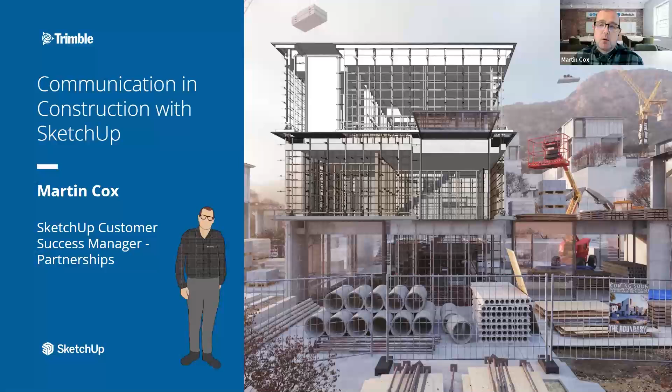So my name is Martin Cox. I'm a customer success manager for our partnerships.

The webinar we're going to be going through is really about communication in construction using SketchUp. We'll be talking about SketchUp and other pieces of software, and how we communicate using different pieces of software. There's going to be a lot of information in this webinar, so hopefully as we go through it's clear. I'm also going to use SketchUp to show some live examples, so hopefully technology will behave as we go through.

So what I'll be talking about: I'll give a quick introduction, and we'll talk about SketchUp and Trimble, more information on what we'll cover in the webinar. We'll discuss why construction is hard - there are so many factors in this. Then introducing connected construction, where we talk about why communication in construction is so important, and how SketchUp can be a big part of this and how it's used. We'll talk about some real life examples, and I'll show some SketchUp models going into more detail around that communication element.

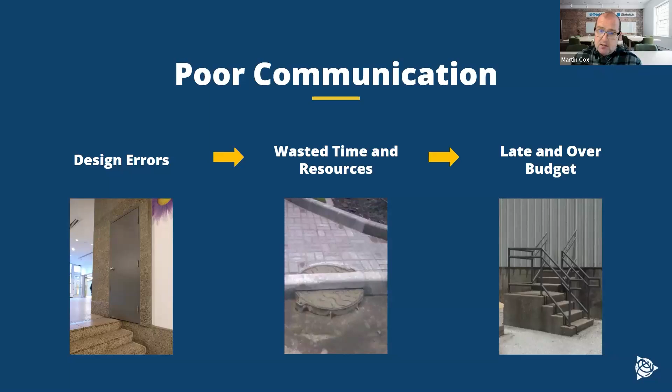So first of all, what is connected construction? We look at what we talk about as the three C's, and these are fundamental building blocks within that construction process that work across the entire Trimble portfolio, and also other pieces of software as well. SketchUp is a true collaboration tool, and we'll certainly talk about that. So, the three C's in connected construction.

So we have connected. This is breaking down data silos to improve interoperability and document management. The benefit to customers is that all aspects and the different phases of a construction workflow are easily shared, easily discussed, and easily understood. So everyone can work through this as well.

Then we have our content. Streamlining our workflows means that we have our library of data. It's all curated, so it can be traceable. The benefit from this means that everyone is looking at the same thing. So somebody's not looking at an old version of a drawing and then saying, okay, this is a different version, and mistakes are made there. People know where something goes, how it needs to be installed, and the equipment that you have at that time.

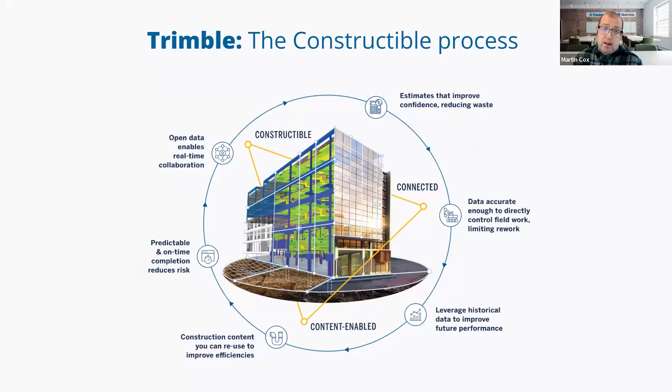So we have proven results around this. We have some huge projects that have worked in connected construction within Trimble, and we've seen a significant improvement in rework, that things are executed faster in the field. There's less waste, and simply the numbers around how many people are connected and how many models are being shared. We're seeing real changes within that process within construction.

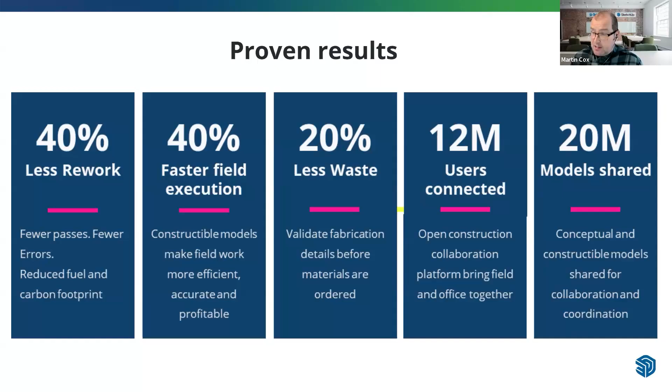Where SketchUp sits within this workflow is literally right from the beginning of creating those concept models, the planning within the models, and then we start looking at other pieces of software like AutoCAD and Revit as well, designing around the models, developing, analyzing those models. We have other pieces of software as well, and visualizing.

And then this part of iterating those different versions of the models—yes, we go around in circles there, lots of changes, but SketchUp sits easily in there as well because we can see fast changes, sharing of those models. And then we have the approvals of the models, full detailed design.

And then again we're with Revit and AutoCAD, or Tekla Structures, and other Tekla Trimble software as well. Then construction phasing, and helping within SketchUp with the visualization of the planning of construction—a big part around this as well. And then we end up with our building.

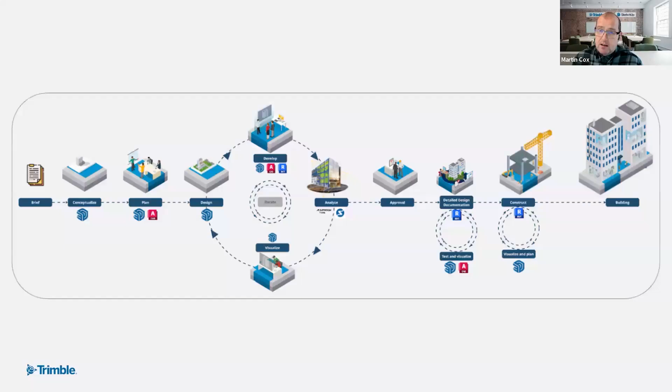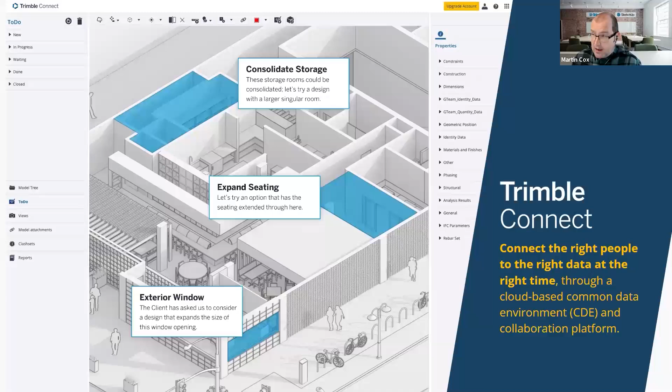But a key part of this is our connected construction, and we talk about this with Trimble Connect, which comes with the SketchUp license. Trimble Connect is a cloud-based platform that connects the right people and the right data, so everyone has access to this. So how does SketchUp really help communicate?

Now we're really going to focus in with SketchUp. It's worth mentioning that as I talk through the next slides and our example demos, we're going to be looking at multiple versions of SketchUp. There are different levels of SketchUp—we have SketchUp Go, SketchUp Pro, SketchUp Studio, and others as well, and they have different tools and capabilities.

I'm not going to go into details in this webinar about all these different versions. The best thing to do is talk to your partners, talk to a reseller, and they will find the best fit for you depending on the workflows you're looking at for SketchUp. Just be aware that some tools, depending on the version of SketchUp you have, you may not have—they come in different versions, and I'll try to point them out as we go. Your partners will be able to help with that and recommend the best fit.

So where does SketchUp sit within that communication workflow, that construction workflow? We know where SketchUp is used, and we understand where it sits. We know that the majority of users are using SketchUp for visualization, also presenting ideas and sharing those models, and documenting this.

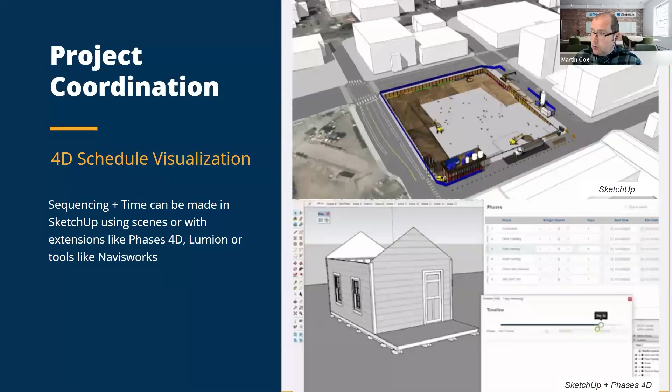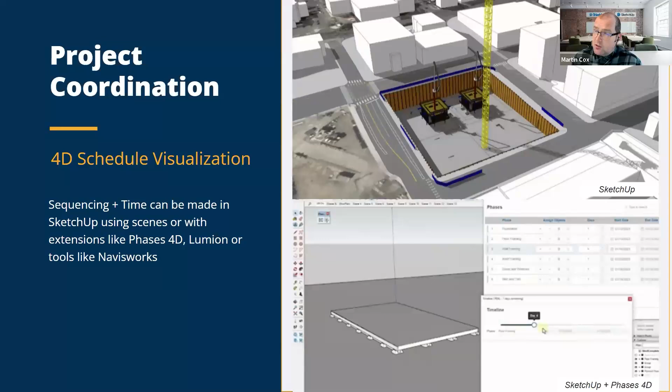There's also project coordination - the 4D schedule visualizations. With the addition of time, we can create these 4D schedules at different levels. So basic 4D sequences have been created within a planning model to show where the site is going to be, the stages around a site, and where things are accessed. Or you can use different extensions like Phases 4D or Lumion, Navisworks, that create some of those schedules as well. That's one area within that coordination.

Another one is project coordination around site logistic plans. Given the complexity of construction projects, creating site logistic plans is standard practice now. Often they can be a static 2D drawing that remains the same, but with SketchUp these plans can contain full elements around the construction, showing delivery routes, locations of where things are going to be. It's great to be able to communicate the site design to a customer saying this is where your site is going to be, this is where we're going to put our equipment, this may be where you're going to lose some parking spaces. So this is where the communication comes in.

Understanding those processes also helps identify areas of potential inefficiencies, areas of concern or conflicts - like the timings where, while the glazing is going up, people cannot work underneath there. So if you have that area of glazing, you don't bring in the team to do groundworks underneath it. We can show that, and SketchUp is often used in these logistic plans because of its flexibility and 3D Warehouse, being able to bring in and say this is where a crane is going to be, this is where a lorry is going to be.

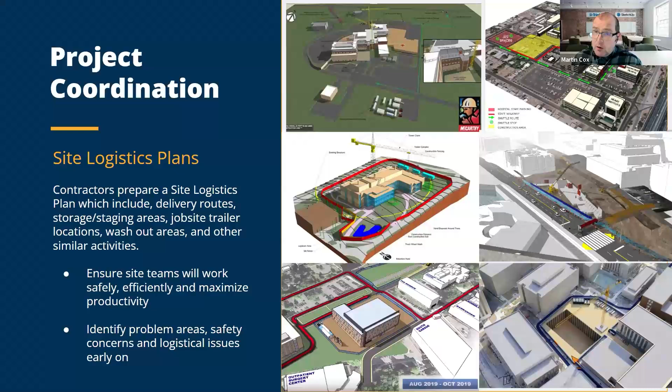Working within those detailed site logistics, you can see how clear it is. With our 3D plans here, we can show delivery routes, delivery locations, storage locations, and those areas as well, and it really helps with all of those things that I mentioned.

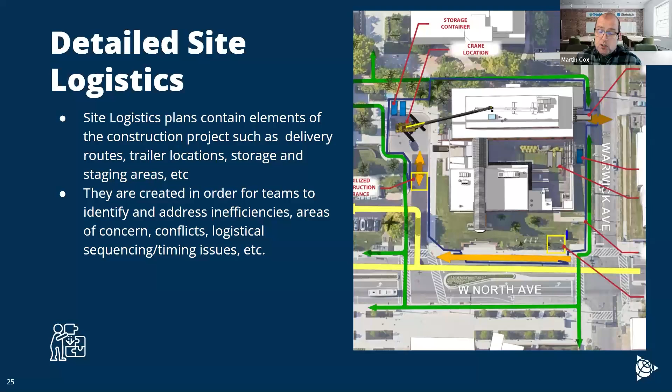So this is a huge part of where SketchUp sits within a lot of our construction customers. Now, something that's happened, and still happens on a regular basis, is these construction mock-ups.

These are basically showing potential complicated areas, and construction companies spend thousands of pounds, euros, dollars, all over the world, actually showing a physical model of how these glazing assemblies are going to go together. They're quite complicated. Now, the physical mock-up is usually developed before the actual assembly is performed, so the trades can learn how things are put together.

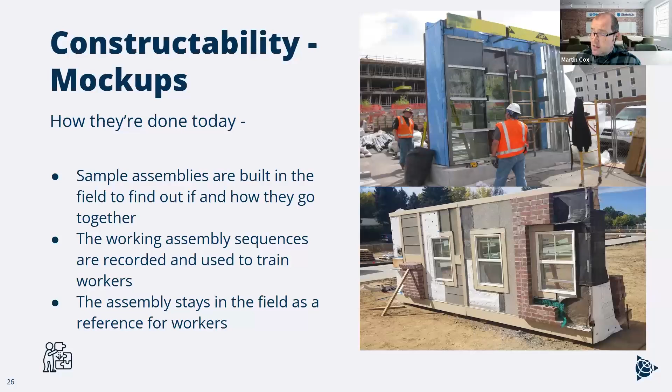That stays on site. It literally sits there, so people come over and have a look at it. But again, a big part of this is creating those virtual mock-ups.

These virtual mock-ups are created first, before the assembly, so they can assist the assembly processes. During design, models can be exploded, they can be shown with more detail. Even with those physical models that we saw, things can't be hidden, so they're carefully designed to almost show those layers.

Whereas a virtual mock-up can explode, it can be hidden. So we can show details here that you could never make, like this example here, seeing how that sits on top, with detail zooming in, cuts and crops as well.

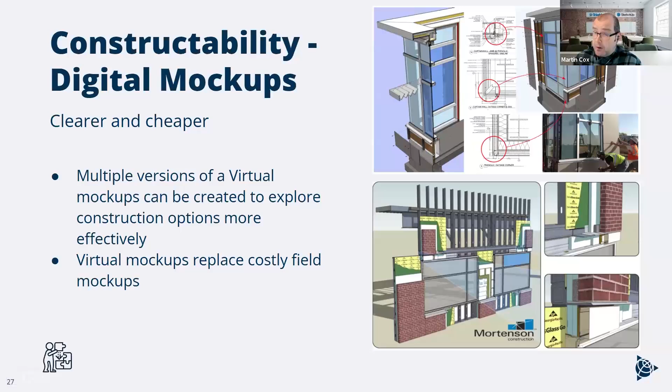And as you can imagine, these are much cheaper to make, and can go into much more levels of detail. So those three-dimensional details can really show the clarity, so it's more clearly understood on the job site.

And these are all real examples, examples of where we've worked with customers around the world. Okay, so let's get into some actual examples here.

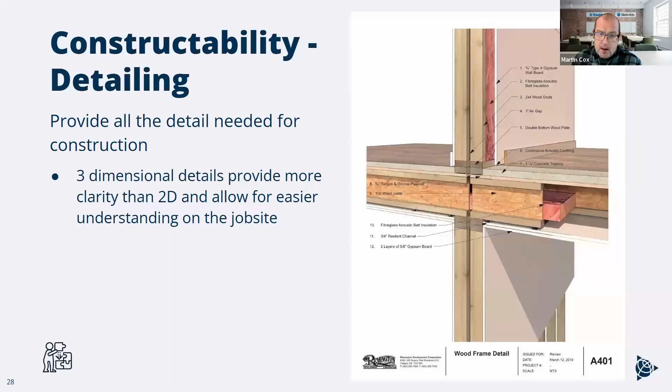Let's start having a look at SketchUp here. Within our workflow and the next example, I'm going to show a video, and it will help explain this because I'm going to talk through these different options. I want to walk you through showing how some of this integration happens. We're looking at using Connect here, using SketchUp right from the beginning of a workflow, and seeing how that expands all the way through.

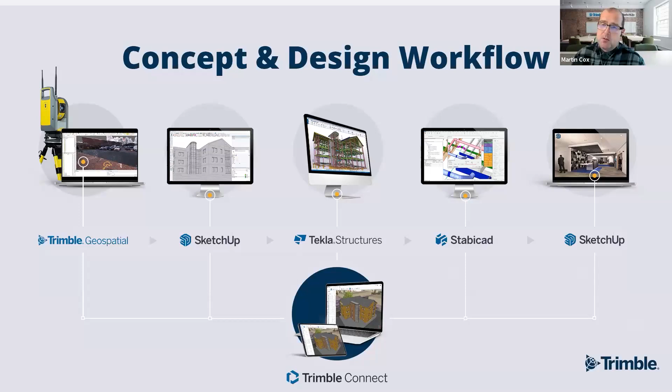So right from literally setting up that site, we're going to introduce some other tools and see how they work within this workflow. So this is a video that I am going to talk through. I may pause it sometimes, I'll be completely honest, I don't believe in trying to trick anyone with video editing. The reason this is a video is we're showing a huge amount of information, different tools I'd be swapping in between, and it's much easier using this option.

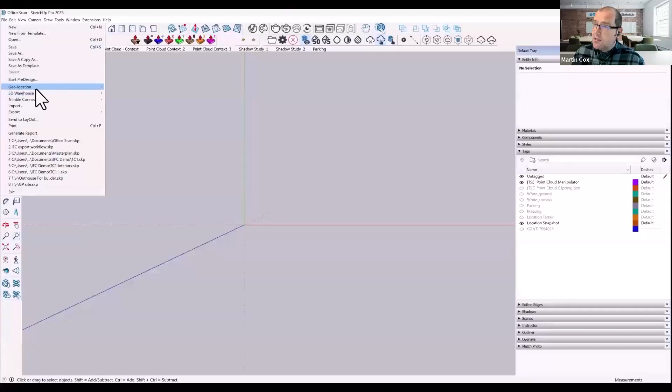So starting right at the beginning, we'll just start this video here. We can literally import the site information using Add Location in SketchUp, so it will be a geolocated model. Using the geolocation Add Location, we can import map data straight away, bringing in this map data of our model. We then have our site plan, and this does contain the tags regarding the terrain. It's not overly bumpy in this area, but it does show that terrain for the model.

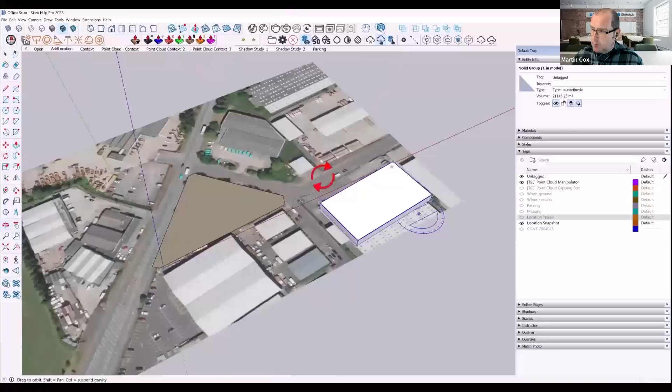And it means we can then quickly create a plan just using some quick 3D models. We'll jump to a model here saying, okay, this is how our site looks with some models around it. So this gives us an idea, we can look at shadows, we can look at how things are going to be, models and buildings that will be in place, which will help with crane positioning as well.

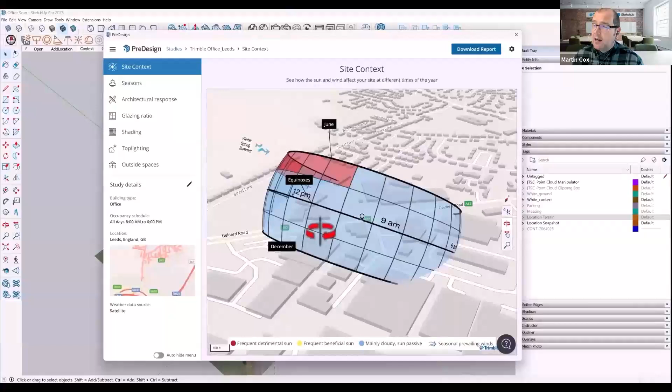Using a tool such as SketchUp PreDesign, because our model is geolocated, we can use PreDesign to actually look at sun and weather data, which will help with the construction process, because we can look at historical weather data to see the type of light we're going to get, how much rain we get, and wind conditions for cranes as well. So it gives us a lot of information here. It also goes further into architecture, but we're not going to look at that.

Using a scan of the site, so opening this with Scan Essentials, and this is in the different versions of SketchUp.

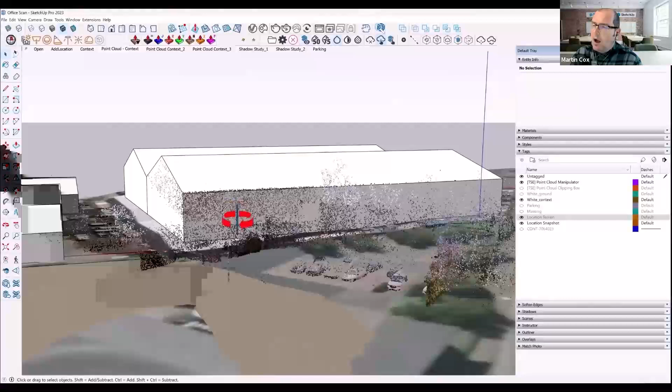If you have SketchUp Pro, you won't have Scan Essentials, but we can import a point cloud of our site. We have a real life scan here using Trimble's scanning hardware, and we can see the site with regard to those building conditions around. So we can look at how accurate our models were compared with the actual buildings that were scanned.

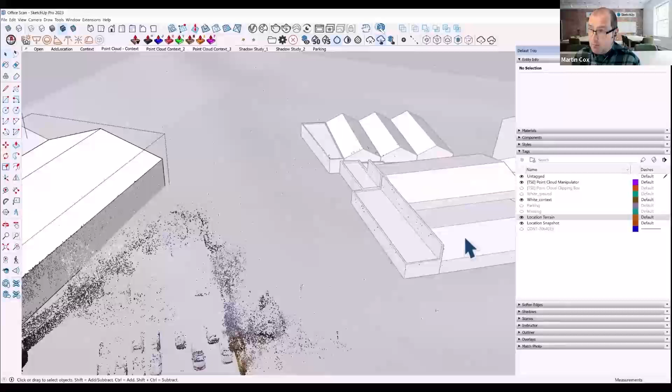We can really start analyzing it and making sure we get these in the right position. This is particularly important for access and machinery, because we need to know about potential overhangs on site. We can see here there's a little bit of a roof that's possibly been modeled a bit lower.

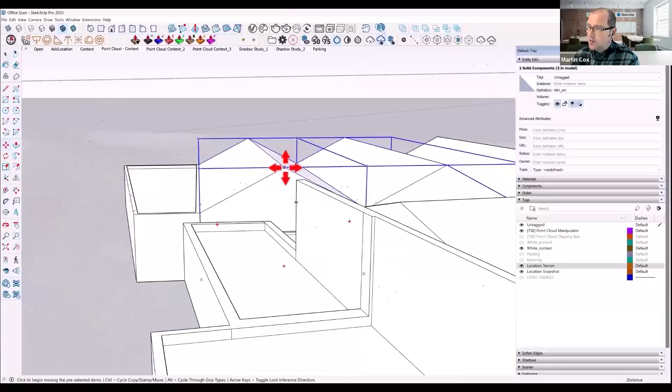Using the SketchUp tools, we can easily adjust that roof so it fits in with our point cloud. The point cloud is a great reference. With our point cloud available, it means we can see trees, and particularly with deliveries and access around there, so we can make sure we're aware of those trees.

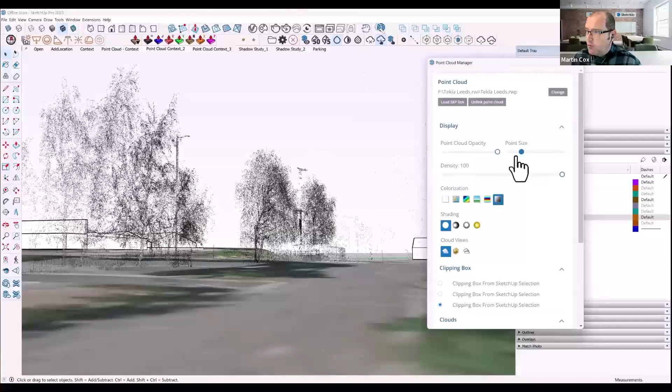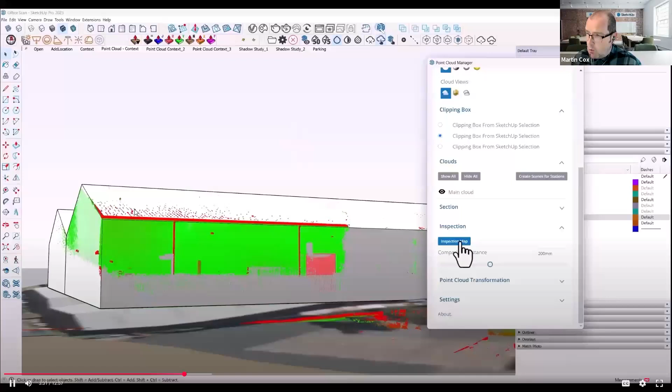There are a number of other tools within Scan Essentials where we can show things more clearly. We can change the point size of our point cloud, but we can also analyze the model to compare the point cloud to our SketchUp model. Using the inspection tool within Scan Essentials, we can show if our model is correct. Here it says 200 millimeters, so that little red area means our model isn't quite right according to the inspection. But there's a lot of information.

Then we have our site. Using SketchUp, we can now create our concept design for a model. At the concept design stage we're not thinking about how we're actually going to build this - this isn't our full constructible model. This is showing some ideas.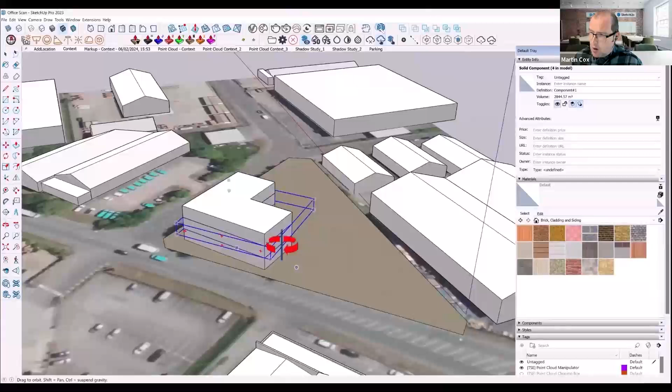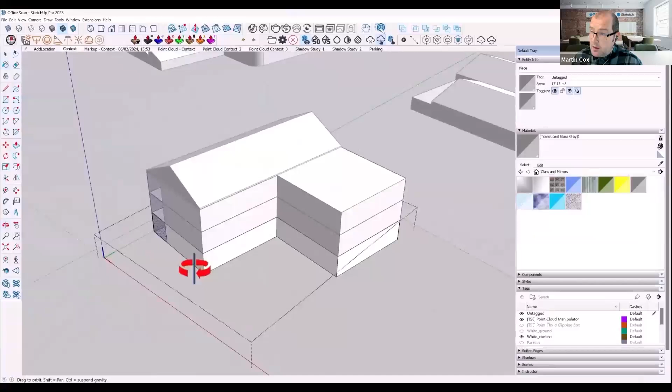This video shows how quick and easy it can be for SketchUp to create a model to show visually, saying okay, this is our site, this is our plan - what do we think about the idea of the model here? We can create simple block models using components, so each floor is its own component - edit one, and it edits all of them.

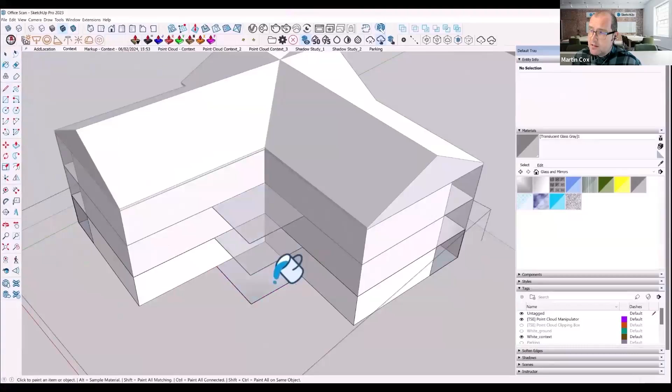We can then say, let's put some glazing on the corner here, let's put some of those brick materials on, and place our roof how we want it. Think about how quick and easy this is for our customers to be able to say, okay, is this what you're thinking? Let's have a look at our site here - is this the type of thing you were looking at? Being this fast and easy to do is tremendously powerful.

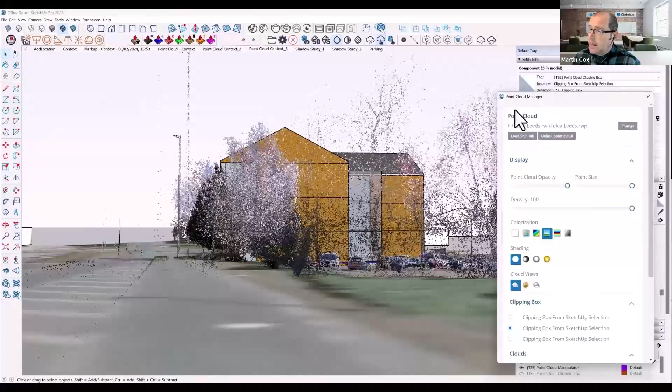Creating these simple models is great, and then within that planning we can start thinking about our site. Combining that with our point cloud, we can see how it sits within the existing trees, basically the existing site that is actually there. With that scan, we can incorporate that, so we need to be aware of those trees, particularly with construction - like, right, we're not going to put a crane there.

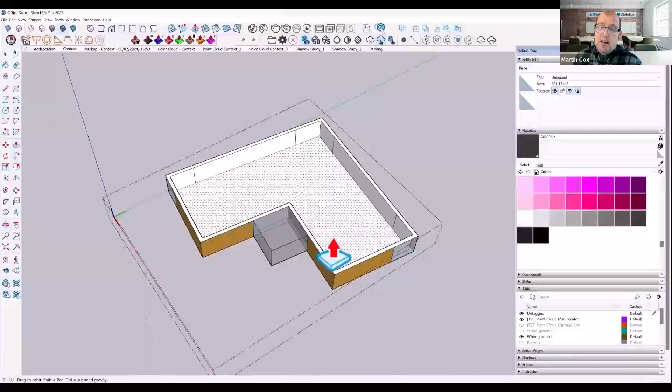So it's being aware of our environment, and we can also start thinking about that on the interior as well. It basically takes our model and those iterations around the model, making sure we have those.

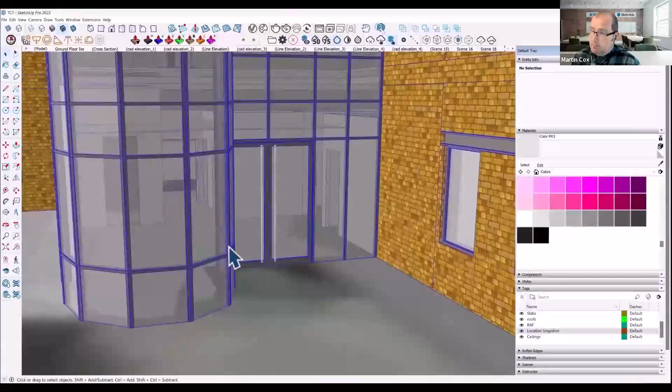We've got a little further with this - we've added some logos, a little bit more glazing detail. Bringing that on site, being able to show the details, we can really start showing how it's going to look, with this glazing detail around the staircase and a little bit more information about the interior of the buildings.

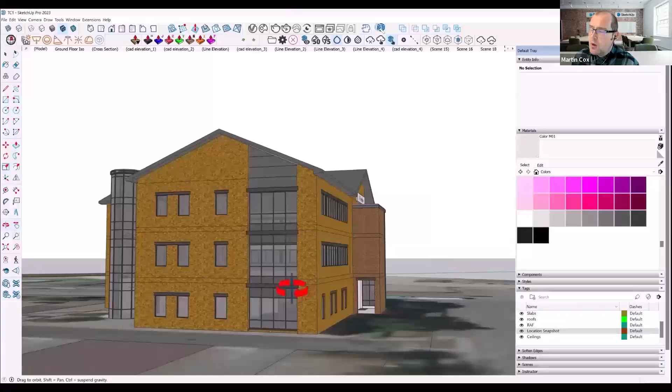Now we're moving into having an architectural model. Taking this, we can communicate around that - we start having our model, and we can put this into Trimble Connect. Using the different tools in SketchUp, we can have our line elevation models and create information packs in LayOut to show the drawings and capabilities around here.

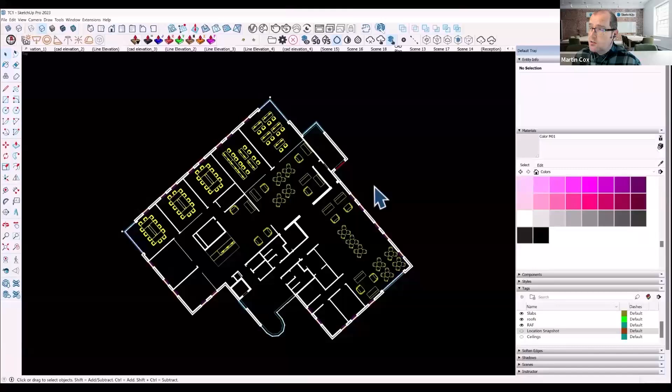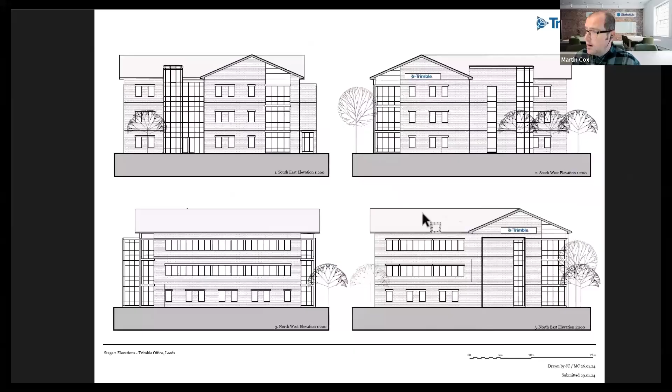So we're exporting this to layout, Trimble Connect in this instance to start with. Within layout, we can have our drawings and at least show people, yep, this is how your model is going to sit. This is the intention of our training rooms, just an idea of how it's going to look.

But then we can take it even further with connected construction. So working in Trimble Connect here at the moment. Inside Trimble Connect, we have literally the structural models. We have the MEP models, which are the electrical and plumbing models, so our mechanical, electrical and plumbing engineering.

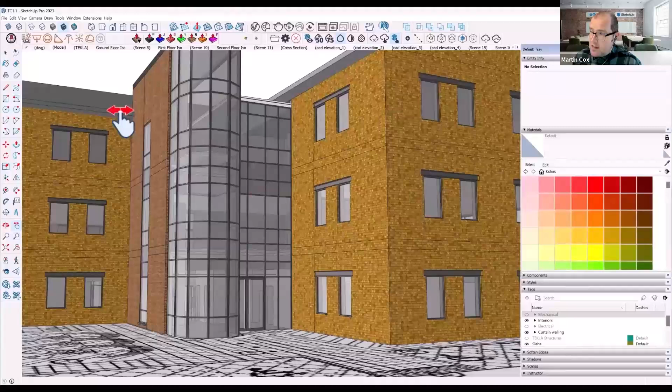Now the great thing is once they're in Connect, we can then use these within SketchUp. We've imported the Tekla structures model in SketchUp here, and we can see how that Tekla model looks. We've also imported the MEP model, so we can look at the mechanicals around our ductwork and piping, so we've got our HVAC equipment there. And now we've got our electrical equipment.

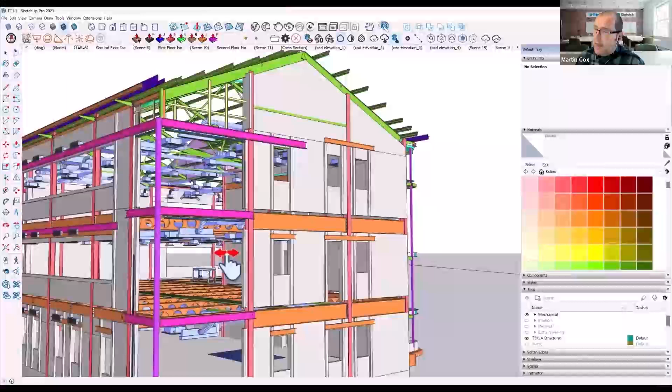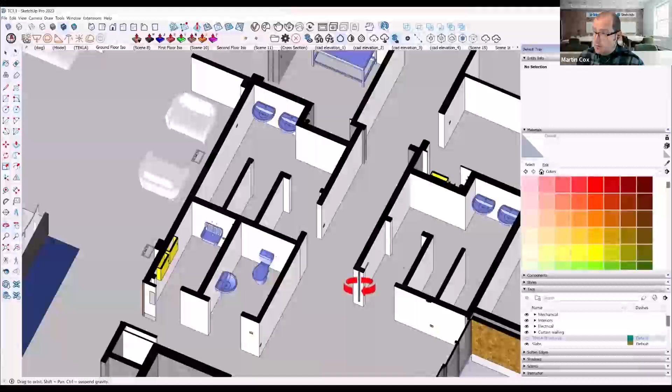We can see where actual plug sockets are going to be, and these are real life positions within our model. Looking at the model now within our architectural model in SketchUp, we can see the correct locations of plumbing. These bathroom accessories aren't from 3D Warehouse, these are actually from the MEP model, which is where they're going to be.

The yellow parts, these are the electrical models. So we can see where light sockets, plug sockets, fire detectors and smoke detectors are going to be within the site. So these are the actual locations.

So for our training suite that we have in the corner here, we can see those plug sockets in the floor, are they in the correct locations? We actually have that within there as well, so we have that information. We can see that they're going to be in the right place.

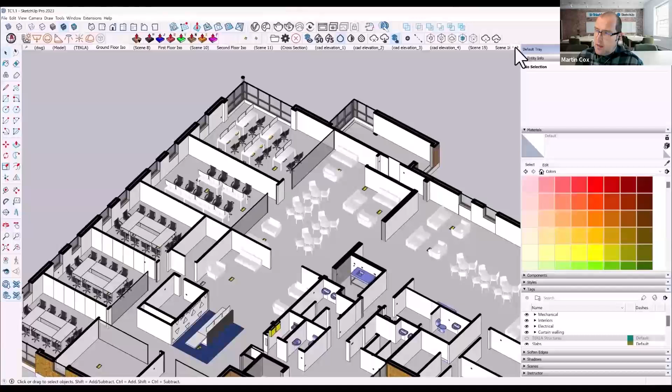Now this works on multiple things. We can see that we're going to have the plug sockets. This is something we've worked with hospitals on, they really like this because they need to see access around certain things. But the good thing about this is, we've got a design model here for our reception, but actually that floating light box is sitting directly over the top of an air conditioning unit.

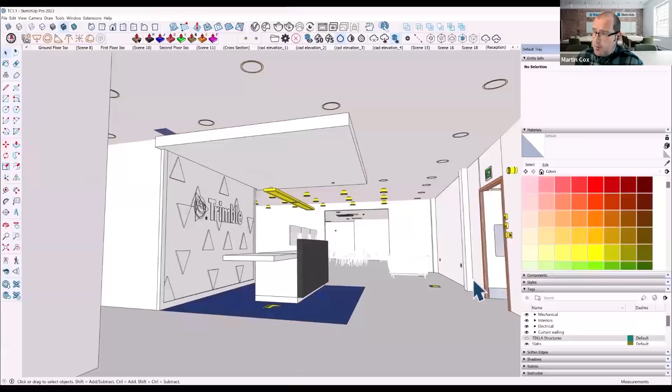So that's something that needs to be looked at. But within our model, we can actually see there's some exposed steel work there. It's like, right, yep, we're going to need to box that in. So we can quickly highlight that. In Trimble Connect, we can put that as an information request and say, look, we need to box this in. But we can then also look through everything within there to make sure we've got all our sockets and information as we go through.

And the great thing is because we've got this level of detail model here, we can then actually bring this into V-Ray for SketchUp. In some versions of SketchUp we have V-Ray included, and all of these little lines and circles, these are actually like light information for V-Ray, so we can do a full render to show how it's going to look realistically. So we've got our lighting here.

We can actually see that in this instance, the air conditioning unit has been moved, so we retain that light part there. It's all been boxed in, but we actually have those switches and the fire detectors within our render. So this is a real life render within our reception.

This can also be useful externally as well, because you're rendering everything. So we're highlighting here that we've got all of the MEP equipment and the HVAC equipment appearing in our model. When we communicate that, we can show the lighting information, so we've got that lighting detail up the wall on the internals there. But even little details like there's some plant on the roof there.

This is something that often catches people out, it's like, oh, I didn't know there was going to be a large unit on the roof. So actually having this connected construction information shows that model all the way through, and we can see our steelwork through the glazing and that plant equipment on the roof.

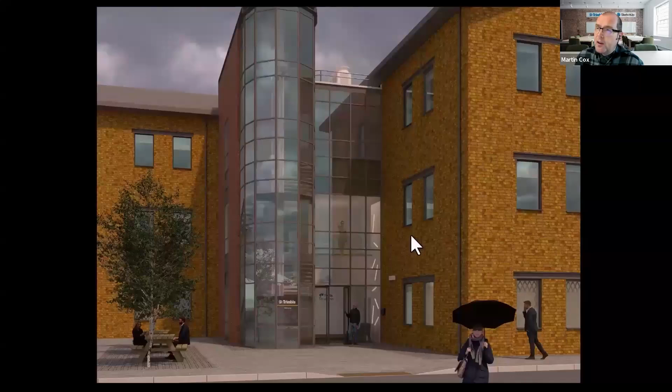And also this model was for Leeds, so of course they're showing somebody with an umbrella, because once we're up north a little bit there. So we have that, but this one's sunny, but we can show those existing trees as well as part of the rendering. And again, some of that electrical equipment, the ducting above the windows.

Okay, so as you can see, that's a lot of information that we showed there. We looked at Trimble Connect, we looked at Tekla Structures, we looked at Trimble Scanning, and we looked at MEP, all around the SketchUp model.

Our SketchUp model was there sort of all the way through. And there's other elements, and I just seen a question come in around that air conditioning unit being hidden. In Trimble Connect, there is actually a conflict option, so it will show where models are actually hitting, and there are conflicts within Trimble Connect.

Okay, so what we're going to do, I'm going to have a look through here. We're not having a look at that one again. I want to go into SketchUp now. I know we're coming up on time, and I want to make sure there's time for questions, so I'm going to be pretty quick here, showing some of those features in a little bit more detail in SketchUp. The first one I'm going to show is SketchUp Scan Essentials.

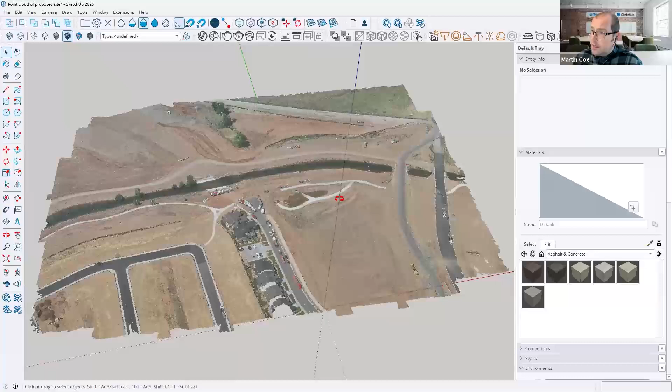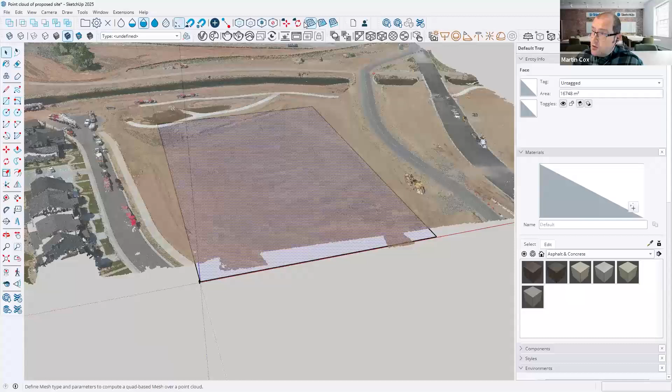So this is my scanned model here, and this is quite a large scan from a drone of a potential site. The good thing is that, using some of those tools, this isn't just a dummy model here. I can actually take my site, and if I quickly sketch or just add a rectangle of the area that we're going to be constructing, and select that square that I've just drawn, and using some of the tools within Scan Essentials, I can create a ground mesh, and this is going to create a full surface of that particular area that I can then work with in SketchUp.

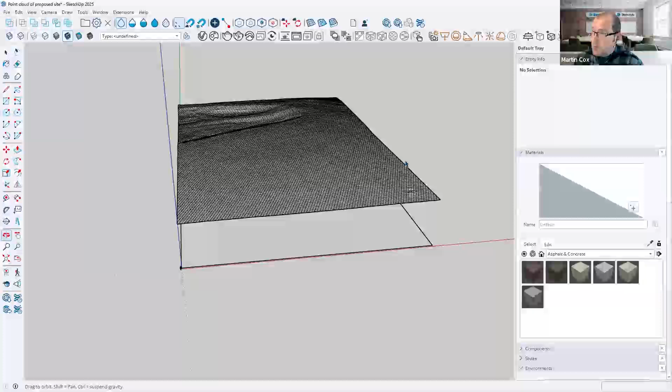So I've now got my ground mesh. What I'm going to do, if I just hide that point cloud, I can actually see I've now got that ground mesh that I can work with. I can select my ground mesh and turn that into a solid as well. Again, these are in the Scan Essentials tools. So we can see we have that model there to work with.

Now, there are other things we can do. We can cut out the area that we're going to be working, and you can actually analyze the area to see how much soil movement there's going to be.

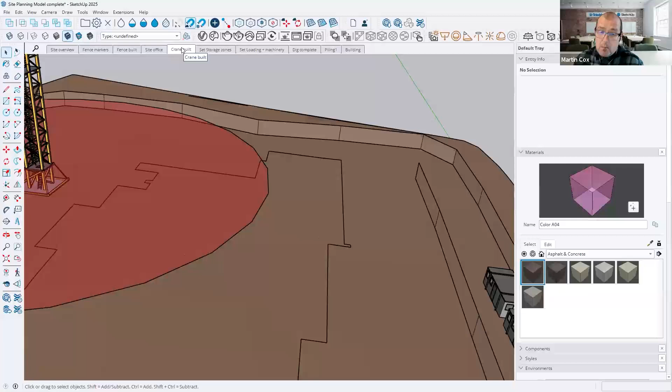But within our site planning model that we're here, so I've got that area, the solid, I've sketched on the area, and we can go through step by step to say, okay, this is where the fence markers need to be, the fence built for the site, that site office using models from the 3D Warehouse, the crane position of our model. This is great with that.

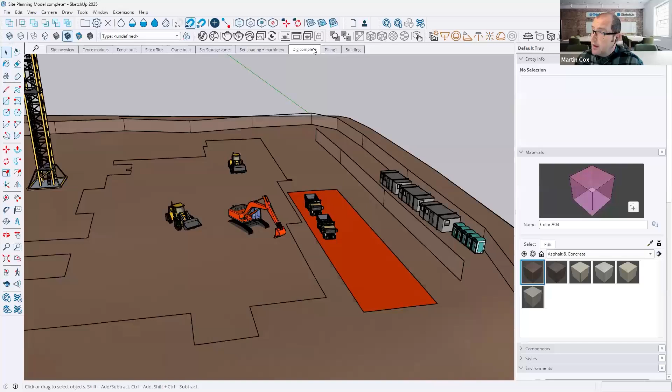Within there, the storage zones that we can specify to say this is where our materials are going to be stored, the loading areas using our 3D Warehouse models of the areas where the machinery are going to be. And we can even start putting a little more information in, such as the dig that we're going to have there, and using the Tekla Structures model, we can show the building.

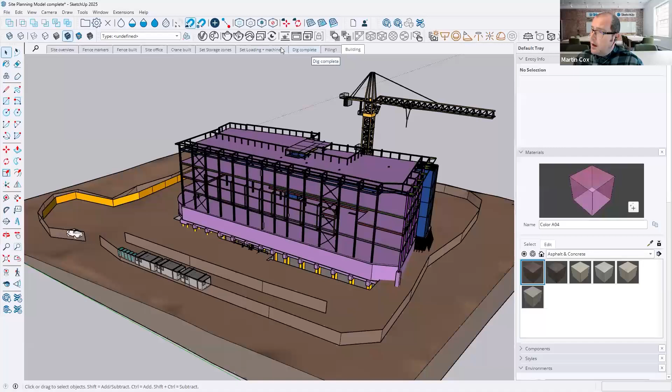So this is a simple example, taking our Scan Essentials site model there and bringing that through. Now, if I go back to our loading and machinery, or our dig on this one, again, another example of where SketchUp is used quite a lot is showing where health and safety equipment is needed, so that's a big part there as well.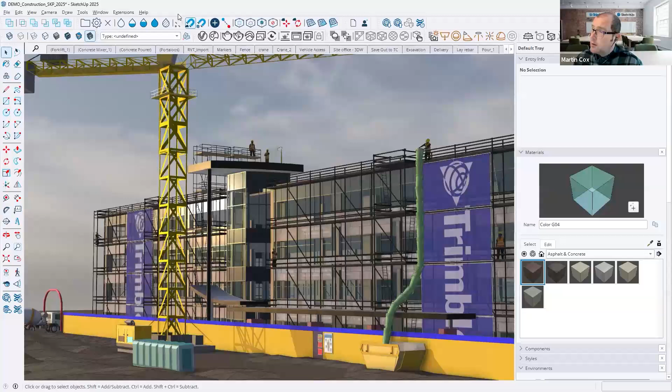Our styles that we set up here, we can sort of set those and set the edits and have our watermark over the top. So this is how this is done. A lot of people think, oh, how are we doing that? But that's a watermark over the top, a PNG watermark.

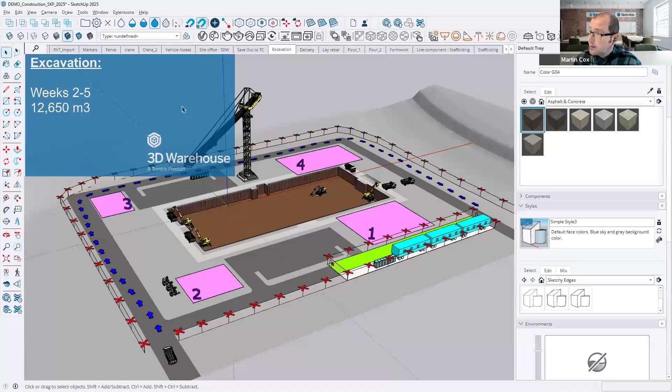So we have our excavation of our site. We look at our loading zones, and then we can really sort of look at the deliveries. We can control with the arrows specifying direction of movement around the site.

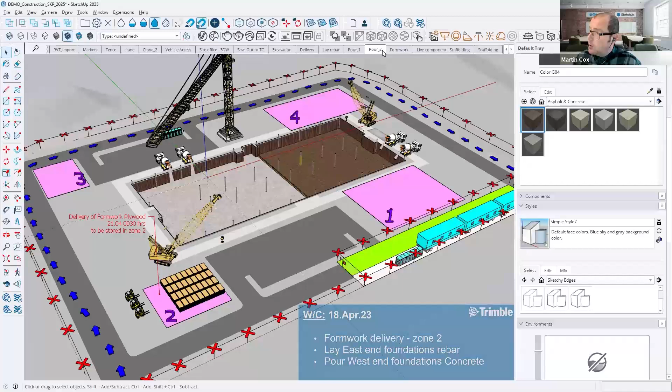Now, using scenes and different transitions here, we can start creating some quite cool effects to say, okay, the rebar is going to be laid in that week. Then we have a look, we start doing the pour, so more rebar. We have the cement pour there. Then we've got the second part of the pour, and lovely fun little details of the concrete coming out of the trucks. The formwork's going to go in, within our pour, and then start putting up our scaffolding.

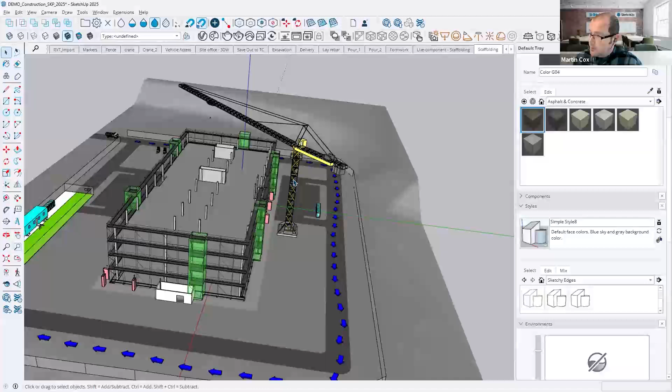We can have our scaffolding zones and label those to say, yep, these are the staircases that we're going to be having. Because labeling those staircases with our detailed zoning, it's simply being able to say, staircase 3 is going to be out of action on these particular times.

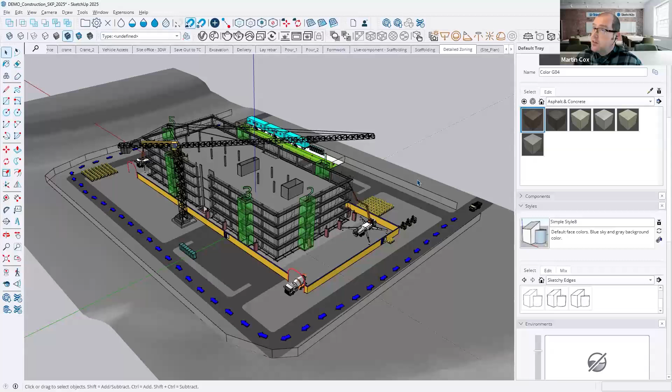And we're still using the Revit model. Basically because using the Revit importer, it recognizes sort of the layers, we can switch things off, such as walls and sort of glazing as well.

We can start sort of really sharing site plans, and people can sort of start marking those. The signage that's going to be required on site, we can specify those requirements for sites. Within Trimble Connect, you can link PDFs to those particular signs and say, this is what we need to be loading. We can import more IFC files.

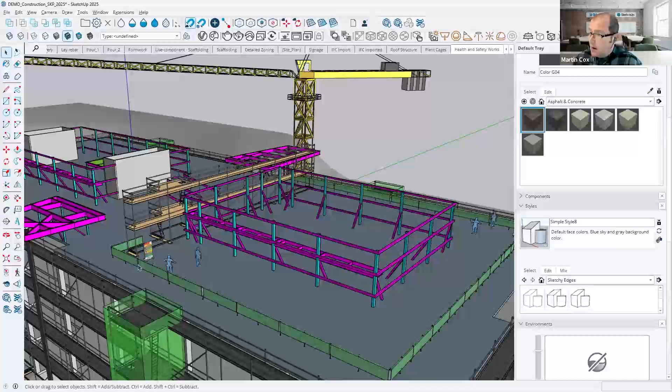This time we're importing a Tekla structures model to show that we have our sort of roofing steelwork as well, and we can see our roof structure. The plant cages that are going to be assembled on site. The health and safety that we're going to be looking at, more signage, and even, this is something we see a lot as well, little 3D models that show you need full harnessing if you're going to be working on a roof.

Lots more drawings, visualizations here. And then we can sort of get back to our visual model that we looked at. So I wanted to sort of talk through that pretty quickly there as well.

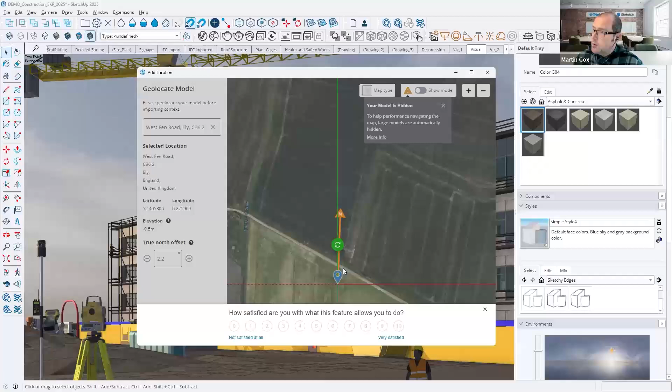Is it possible in SketchUp Pro to set project north and site north coordinates? So looking at that, we saw at the beginning, when you import, like add location, we can set that up. I'll bring that across to the screen. We can actually geolocate our model. Let me show that model, sorry, it's hidden, that's because it's a large model. That's fine, so I can actually choose where I want this model to be geolocated within our site. I can choose the actual location of that model, and that will then have that coordinate system there as we go through.

A couple of people have asked about the generate report feature. So if we go within file here, and... I turn that off. Generate report, so see, that was just complete blindness on my part. So generate report there, this is how you would set up and generate those reports. It will create a number of sort of settings. It's just loading up our settings because again, it's looking at quite a large model here. So that's just loading up the report generator.

It can already start to see that there are a number of reports in here, like concrete volume. So there's a report that's been created, and we can then export those reports in spreadsheets, component quantities reports, and I can run those. I'm not going to do that now because it will just take a little bit of time, but that's how to create new templates, new reports, and you can start creating things like bill of materials, which I saw there was another question around as well. So it will utilize components and it will then show you how many of these particular components and the sort of area around that. But there's a number of reports there.

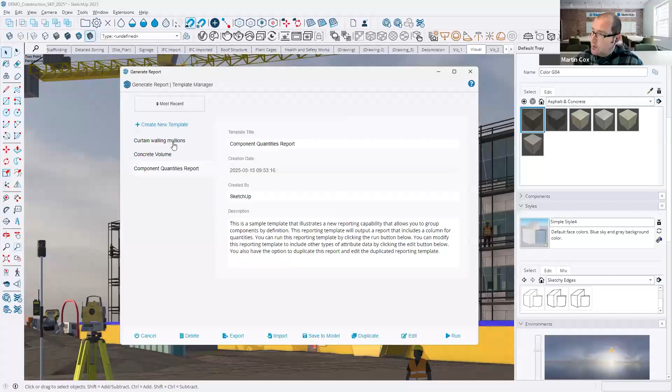If I edit a particular report, like the Curtain walling mullions report here, we can see this is how it's created within the attributes of the models, and then it will create and export that report. So, a very powerful tool that not everyone knows about.

Okay, so people have mentioned about translating work they do in other pieces of software such as Revit and ArchiCAD.

IFC - when you import IFC models like from ArchiCAD, it will recognize IFC capabilities there. We've done a lot of work on IFC compatibility around SketchUp, making sure it recognizes the IFC metadata and component metadata as well. I mentioned the Revit importer - we have that direct Revit import to get your model into SketchUp so you can work through there as well.

Do you have any documentation on Trimble Connect CAD? So if that's information around how to use different 2D drawings in Trimble Connect, yes, there's help around that.

Is SketchUp compatible with Mac? Yes, it is. Now, there are some aspects, if you look at SketchUp Studio, that's not really aimed at Mac, like V-Ray and the Revit importer. But SketchUp Pro is definitely used on Mac as well.

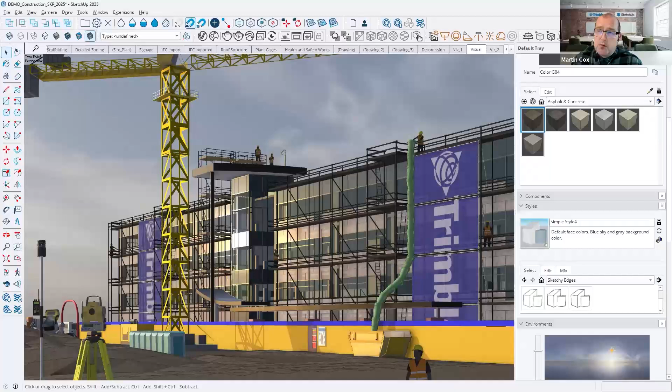Clash detection on MEP and structure elements - in Trimble Connect, we have clash detection, so these reports can be run in Trimble Connect. I wish I had more time to show you that, but again, partners will be able to help with that. Questions around Trimble Connect, they'll absolutely be able to help with that one.

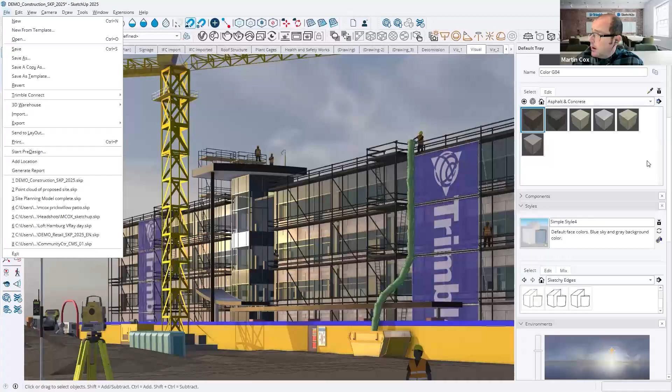A few people have asked about import of Revit. It really is as simple as saying import and searching for the Revit model, and that will come across. Within the Revit model, it will recognize things like walls, structural columns, roofs, ceilings, floors, doors, and curtain walls - it recognizes those models as well.

Can you learn SketchUp by yourself? Yes, there are lots of free courses. To be honest, if you search SketchUp Learning on YouTube, there are thousands of YouTube videos.

How often is SketchUp used as a site planning tool? Significantly - hundreds of construction companies are using it for that. How is it traditionally done? Often with 2D drawings that get out of date very quickly, and weekly planning meetings to discuss what things are going to be closed that week.

So yeah, okay, there are lots more questions. Actually, two people asked the same question, and I'm going to very quickly show that - SketchUp importing DWG files from AutoCAD.

Yep, file, import - and you'll see that SketchUp was designed to be collaborative. We can see so many different files, like AutoCAD DWG files - bring those in, tidy them up, and actually use them for extruding walls and things like that.

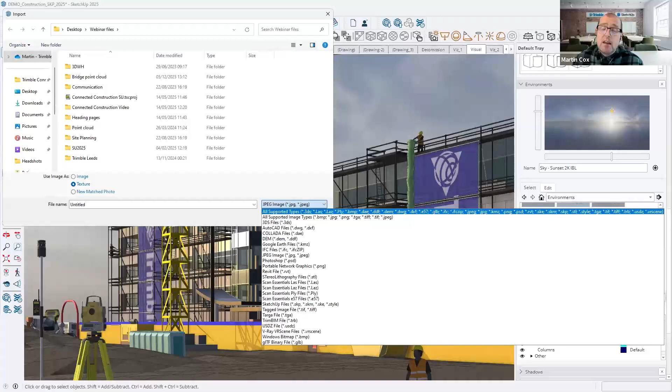Okay, language - yes, different languages are set up in here. The version of SketchUp I'm using today is SketchUp Studio, which has the Revit importer and point clouds. You'll see the menus - I've got the Revit menu here, the Scan Essentials or point cloud menus, and the Revit importer as well.